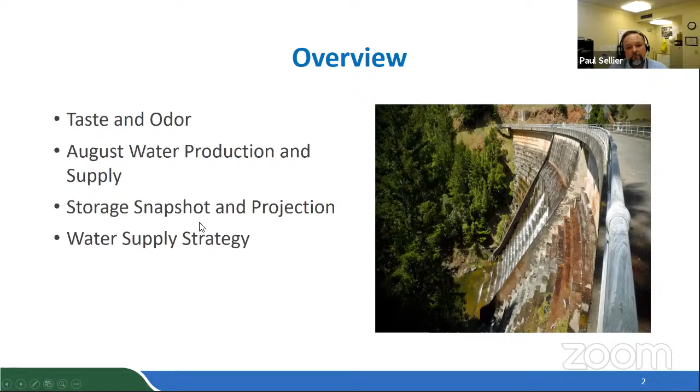So, taste and odor - obviously this time of year, September, October, is really the height of what we call taste and odor season. You can see that from last year's chart, shown in blue for August, where we had a spike of customer inquiries and complaints about the taste and odor of our water. This August, however, we've managed the situation a little better, with just 3 complaints for August.

However, the system we have some concern with is our Alpine and Bon Tempe reservoirs. Those reservoirs are linked - Alpine pumps into Bon Tempe Reservoir, and from there it goes to Bon Tempe Treatment Plant. In Alpine, we're finding increased taste and odor numbers through our lab analysis, so we've stopped pumping from that reservoir into Bon Tempe. That's helping us keep the water taste decent coming out of Bon Tempe, but there's a limit - Bon Tempe is a small reservoir with some 4,000 acre feet, so there's a limit to how long we can really do that. Maybe another week or 2 or 3 at the most.

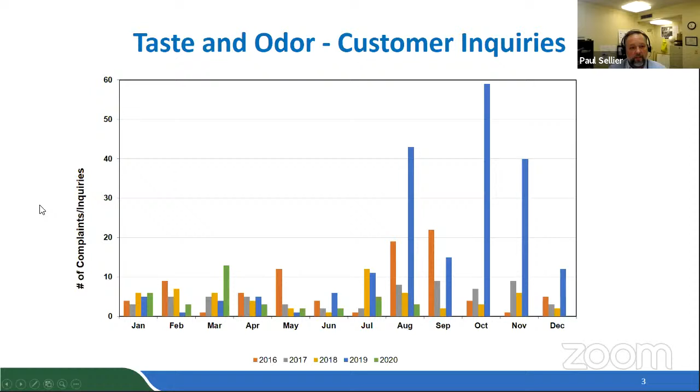That taste and odor panel was sort of replaced by the analytical instrument that Director Russell mentioned, so we're able to measure these compounds down to about 1 part per trillion. Okay, thank you. I can always come back to this if there are any other questions.

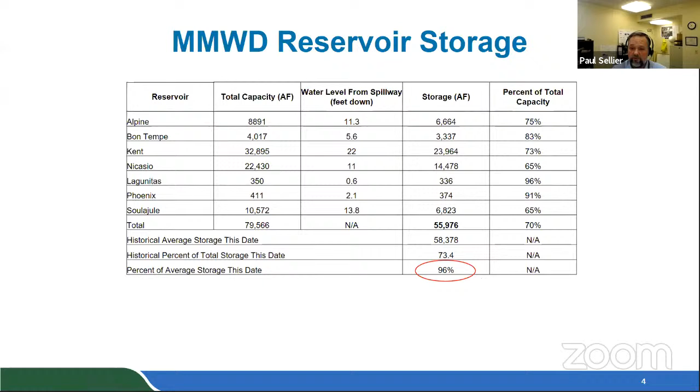Moving on quickly to our reservoir storage. From this slide, we finished August with about 96% of average storage for the date, so we're tracking pretty well with our average storage level at the end of August. Our water production numbers for fiscal year 2021 are very similar to last year, and our imported water production reflects our slight increase in take, pulling water from Sonoma.

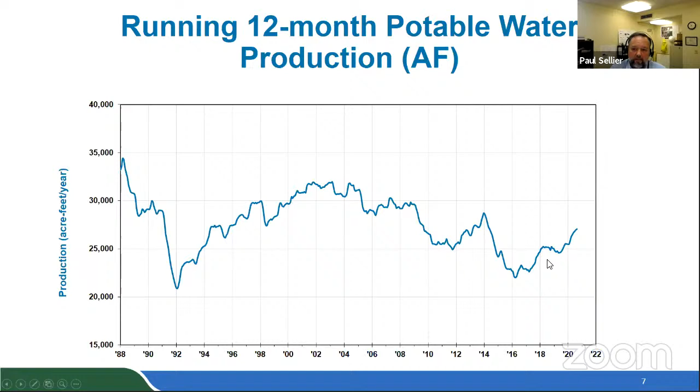This is similarly reflected in our running 12-month average. And while it's still trending upwards, I don't know if it's my imagination, but I kind of see that curve turning, and I'm hoping it's going to continue, which would mean we'll have peaked at that point. But stay tuned for that one.

Our total reservoir storage, graphically, the green line here is where we are, and the black line just above it, so we're tracking pretty exactly within 4% of that. And of course, we're in much better shape than we were in 90-91 and 76-77.

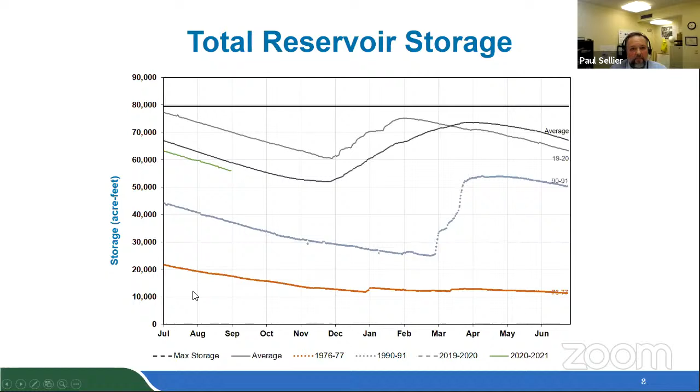Our snapshot, as of yesterday, in the table on the left are our reservoirs, and again, 96% of normal storage or 69% of maximum storage capacity. Over on the right is the Lake Sonoma storage, showing 75% of capacity, and also about 95% of normal for this time of year. So very similar tracking in terms of water storage.

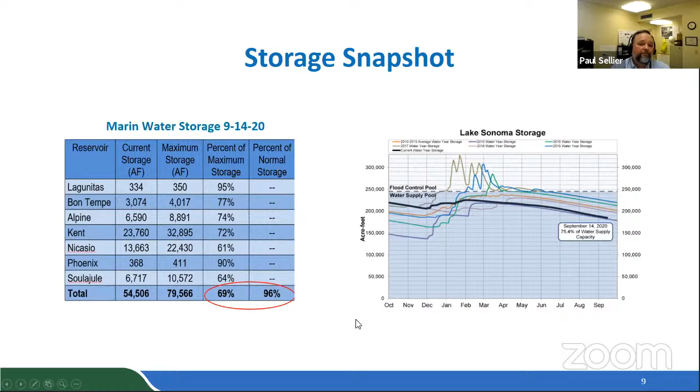Looking at our planned water purchases, July and August are in the books, and this was what we were able to do. We didn't quite hit our targets of 750 acre feet. That had to do with some construction in July and the difficulties with fires up north, where Sonoma asked us to slow down a little bit.

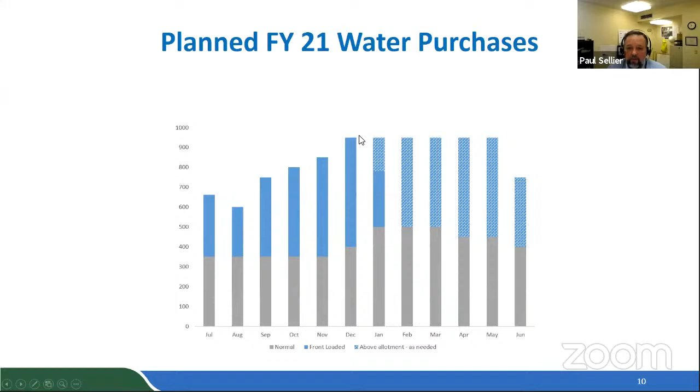So we're still projecting, as a refresher, the gray bars would be what we had historically taken, our 5,300 acre feet minimum take or pay. The blue bars on top of the gray reflect our revised strategy to accelerate our purchases, so that come January, where the chart changes into the brick pattern, this reflects where we would have finished our normal allotment of 5,300. We would be in a position to continue to take more water should that continue to be dry.

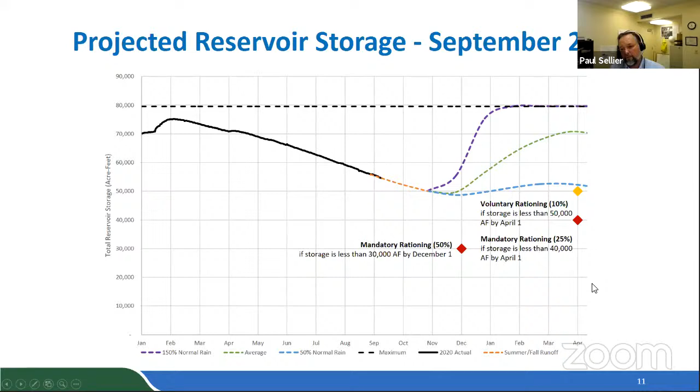So in summary, we are in taste and odor season. It is a seasonal thing, and it is temporary. They will dissipate, though it does take some time, and we have limited tools in our arsenal to deal with it. Our water storage is tracking on average, and we're in a decent position for this time of year. Our strategy has been to front load our purchases of water, continue through water use efficiency and demand management, and of course we're continuing to watch demand and storage levels.

The weather outlook, I hesitate to say it's a typical summer pattern because the last few weeks have been anything but typical, but basically dry and warm going forward. That concludes my presentation tonight.

All right, I have just a quick question. I've got a few comments from people and one letter that says we in our district are in a drought, and we're not letting people know that.

We're not saying drought. I understand from your report that our water supply is good, healthy, but our rainfall has been lighter than normal, that's problematic. So the question is, do we define drought as weakness in our supply, our quantity of water, or do we measure that by rainfall? And what triggers an acceleration of communication to people saying, hey folks, we're in a drought, be careful, think drought? Our present water supply or water shortage contingency plan really targets storage levels.

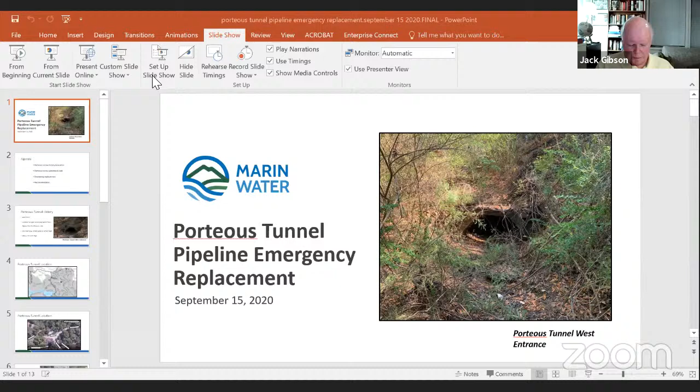Thank you. Okay, number 12 is invoking the district's emergency contracting provisions, authorizing the general manager to execute all contracts necessary regarding the Porteous tunnel pipeline. Thank you, Director Gibson.

I'll be leading the discussion on this tonight. So tonight's recommendation is that the board approve Resolution 8597, invoking the emergency contracting provisions to replace the Porteous tunnel pipeline.

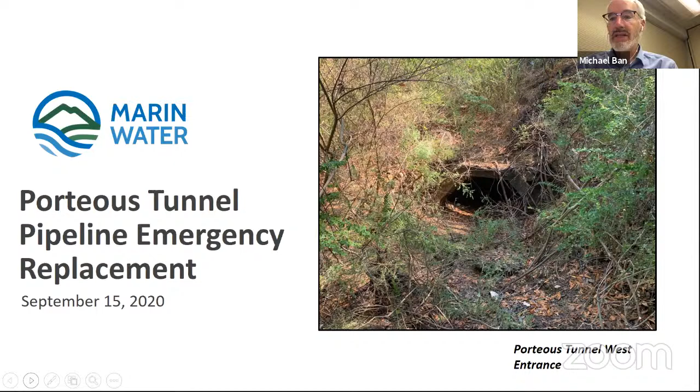Terry's going to help me here. So I have a short presentation here tonight. I'm going to talk a little bit about the Porteous tunnel history and location. We'll talk about the pipelines that are in the tunnel and also the leak that we discovered a couple weeks ago. We'll talk about the emergency replacement, what we're planning to do and why we think this is an emergency. And then finally, we'll end with the recommendation.

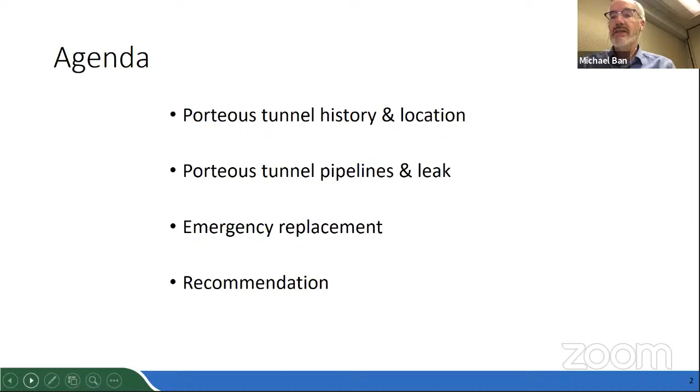Next slide, please. So Porteous Tunnel was built in 1917 as part of the water system to convey water from Alpine up through Pine Mountain Tunnel and down into Phoenix Lake to bring water to Central and Southern Marin.

On the right is a photo of the west entrance to Porteous Tunnel. The fact that you can see it shows the work the watershed team has been doing out there, because when we first came out it was quite overgrown with brush. It's been used as a conduit for conveying water from Alpine Dam to Phoenix Lake, carrying the pipelines that go through it.

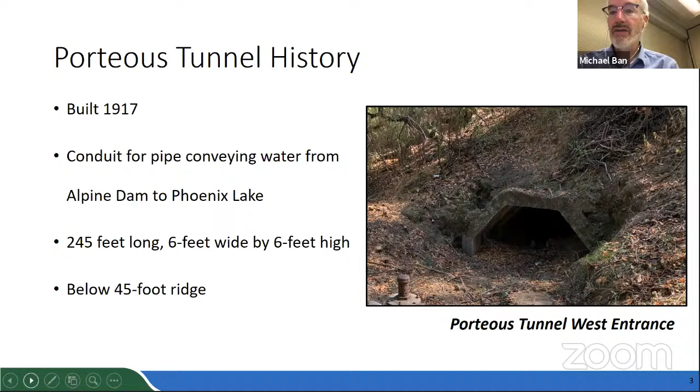The tunnel itself is about 240 feet long. It was originally built about 6 feet high by 6 feet wide. It's now just a couple feet high. It's been filled in at the bottom, and it sits below about a 45-foot ridge. I'll show you exactly where it's located on the next slide.

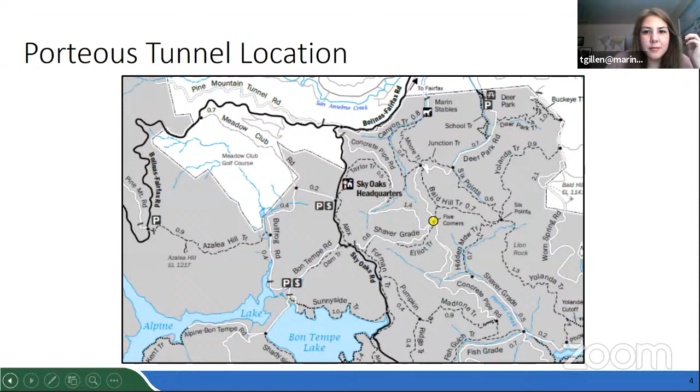The tunnel is located at the intersection of 5 Corners. The typical way to get there by bike is up Bolinas Fairfax Road, and before you hit Sky Oaks Road, you turn left on Concrete Pipe Road, shown at the top of the drawing. The pipeline actually follows Concrete Pipe Road, a very nearly flat road. Then you reach the intersection of Shaver Grade, Concrete Pipe Road, and Deer Park Fire Road, and there you find yourself at 5 Corners.

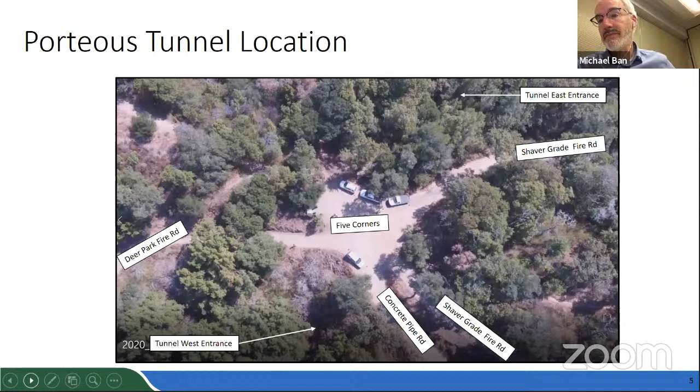This is an aerial shot of 5 Corners where the tunnel is located. Again, Concrete Pipe Road comes from the bottom of the screen and takes you all the way to Bolinas Fairfax Road. Shaver Grade Fire Road, on the right, takes you over to Phoenix Lake, and on the left we have Deer Park Fire Road. The west entrance of the tunnel is near the bottom of the screen in the dark, vegetated area -- you can't really see it, but I wanted to show the conditions out there. It's quite vegetated. The tunnel proceeds under 5 Corners, and the east entrance is near the top of the photograph.

That pipeline leaked quite badly, so the district quickly replaced it just 7 years later with a 26-inch steel pipe in the exact same location, from Alpine all the way to Phoenix. The 1919 concrete pipeline was abandoned.

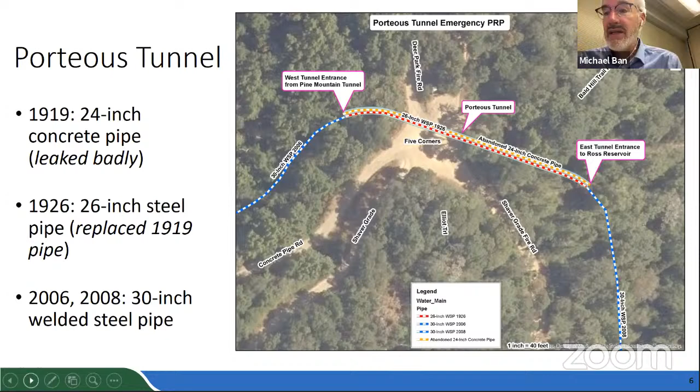So we have 2 new pipes coming in and out of the tunnel, but within the tunnel, we have the original 1926 pipeline still in use. Okay Terry, if you could go to the next slide, please.

This pipeline, the 2006 steel pipeline tying into the 1926 pipe, conveys water from the San Geronimo treatment plant up to Ross Reservoir and then down into the Ross Valley. It actually ties into a pipeline from Bon Tempe downstream of the Porteous tunnel. So the two pipes come together, and then the two treatment plants are able to provide potable water to the Ross Valley. Next slide, please.

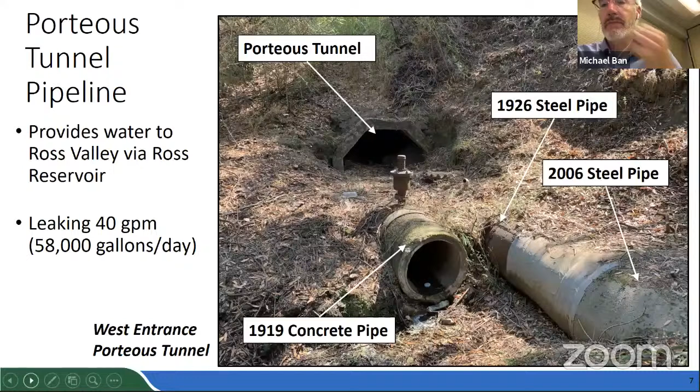We have a number of concerns with the 1926 pipeline. We're concerned that it could be prone to further damage. We're not exactly sure what caused it to start leaking, but it's possible that the caving in of the tunnel might have led to it starting to leak. And if the tunnel were to continue to do that, would the leak be exacerbated? We're also worried about possible erosion from the water leaking out of the tunnel. And then we're concerned about the water loss. The 40 gallons per minute is almost 60,000 gallons per day, and we like to mitigate water loss anytime we can.

The other factor here is that the rain season is quickly approaching. And if we were to conduct the replacement of this project under a normal time frame, we likely wouldn't get out there for another 3 or 4 months. That would put us right in the middle of the rain season, and this site will likely be a fairly muddy mess at that time. So we feel that replacing the pipeline is urgent, and we need to do this as quickly as we can. So next slide, please.

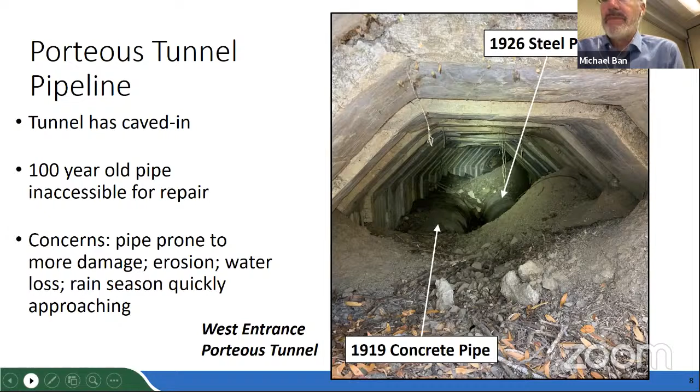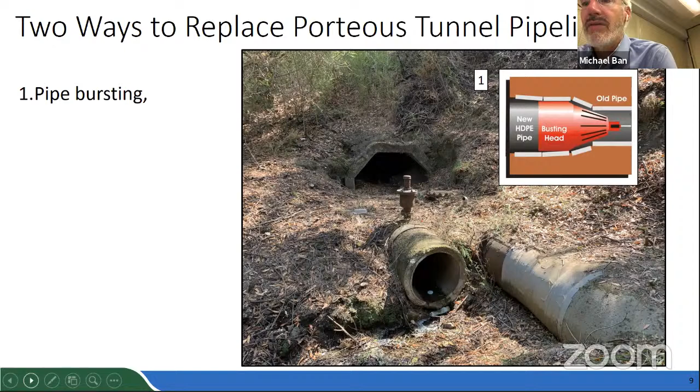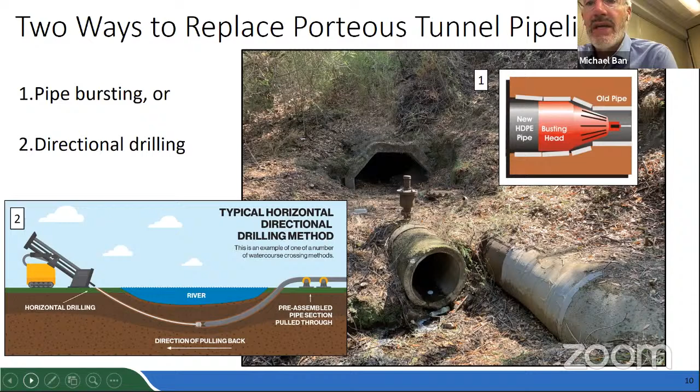The second way would be to do horizontal directional drilling. Basically what we would do here is drill a borehole from the east entrance to the west. We would pull a new pipe through the borehole and then tie it into the 30-inch welded steel pipe that we installed back in 2006 and then in 2008. So these are two options that we're looking at as far as replacing the leaking pipe.

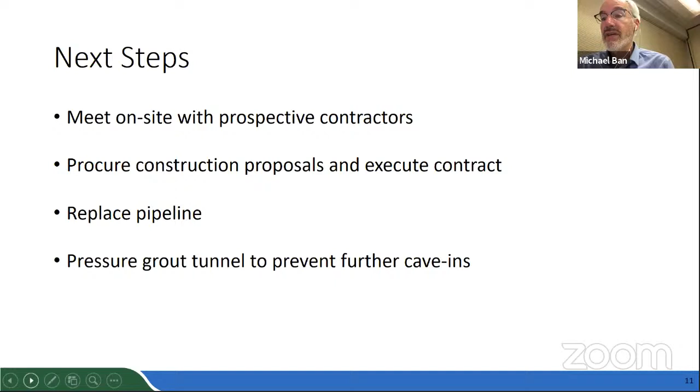So the next steps for us are we're going to meet with prospective contractors that have experience in both types of replacement methods. We're going to procure proposals from them, and we'll be executing a contract and conducting the pipeline replacement work as soon as we can. And when that's done, we're going to pressure grout the tunnel to prevent further cave-ins.

So the need for the emergency replacement here is that we're interested in mitigating the ongoing water loss as soon as we can. We're also interested in preventing any further erosion from happening out there, and also erosion that could possibly damage the road. And then we're concerned about the condition of the 100-year-old pipe that's leaking and currently in use.

Is it prone to further damage? It's possible, and we want to replace it as soon as we can. And we want to do this work before rainfall and runoff start to degrade the site and we're no longer able to do the work.

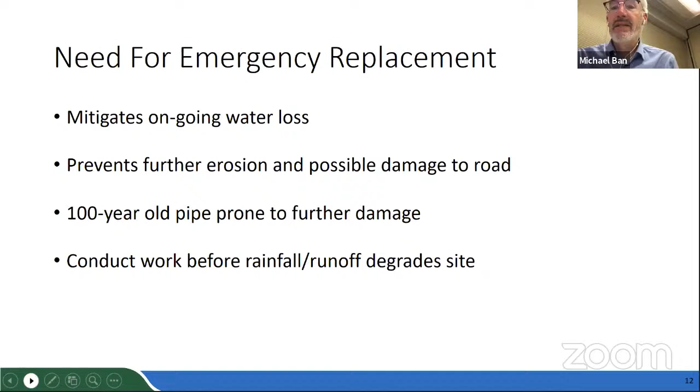So tonight we're recommending that we proceed with replacement of the leaking Porteous tunnel pipeline. We're asking that the board approve resolution number 8597, which will allow us to do this work expeditiously. It also will invoke the district's emergency contracting provisions found in District Code Section 2.90.055A. This resolution directs the general manager to execute all contracts and proceed with the replacement project. I'd be happy to answer any questions you might have.

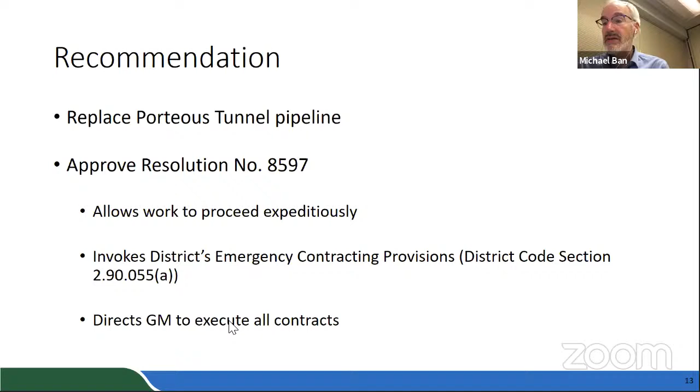Okay, Mike, assuming approval here, when would you anticipate being able to start work, and how long do you think the job would take? We anticipate being able to start probably by the end of the month or early next month, and we think it'll take about 4 weeks to complete the work.

Okay, how do you intend to make the decision on what you're going to do? Likely will be price. We'll get prices from both, from contractors that do both, and then most likely go with whoever can do it for the least cost.

And it seems to me it might make sense, Mike. It's a very intriguing project. It might make sense to send a camera through there. So actually, Larry, we sent a camera through the 1919 pipe, and that pipe is in good condition.

So if we do go with the pipe bursting method, what we would do is install a smaller diameter pipe in the 1919 pipe and use that as a temporary bypass so that we'd still have water flowing while we were pipe bursting the 1926 steel pipe. So yes, we did TV it, and it is usable for this purpose.

That's interesting. I was actually thinking about sending it through the tunnel above grade, to see what the tunnel looks like. Well, we wouldn't be able to do that because the tunnel is caved in. You think it's caved, impassable? Yes.